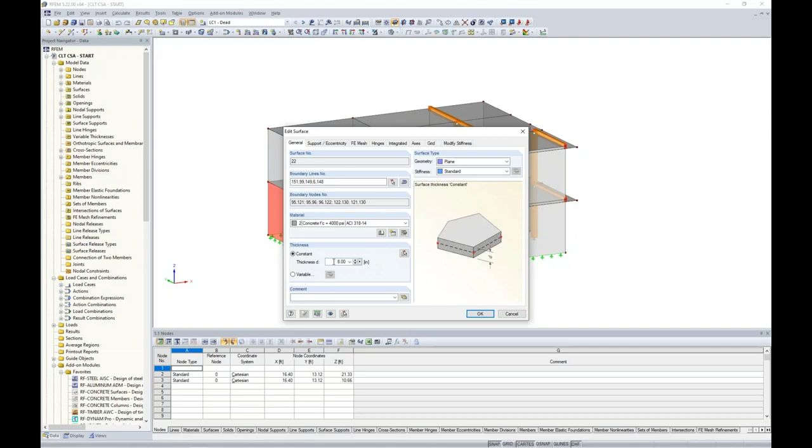and I have also applied some basic loads. But you'll notice that the entire structure is this gray color. And if we click on any one of these panels, you'll see here that the material was defined with concrete. So with the process of modeling a CLT structure within the main program first, we just need a simple placeholder for all of these panels. Concrete, steel, it doesn't matter, as well as the thickness doesn't matter, because eventually within the RF-LAMINATE add-on module, we're going to override this material with our true CLT composition details. So for now, we just have our placeholder here of concrete.

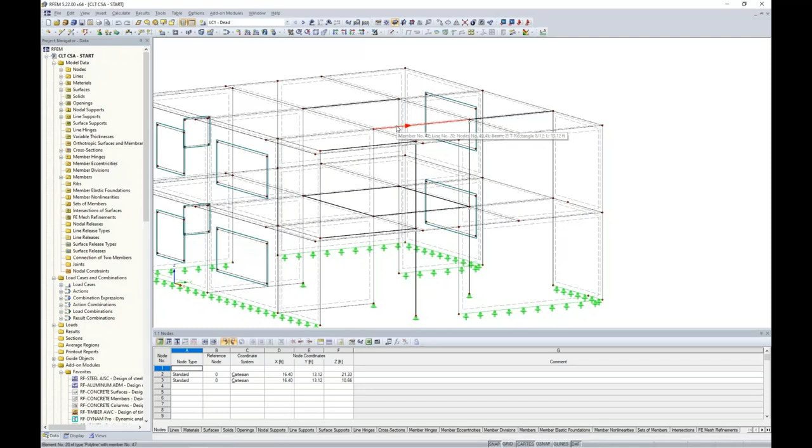You'll also notice that I have some beam members within the program as well as columns. So these are just typical glulam members. For example, we have these beams here that will be holding up certain portions of our CLT ceiling up at the roof. And what you'll find when we turn this into wireframe view is that 1D members are represented by 1D line elements. And so when we turn this into the rendered version here, you can see that the center line of the beams lines up with the center lines of the CLT panels, when in fact we'd actually like to drop these glulam beams below the CLT panels.

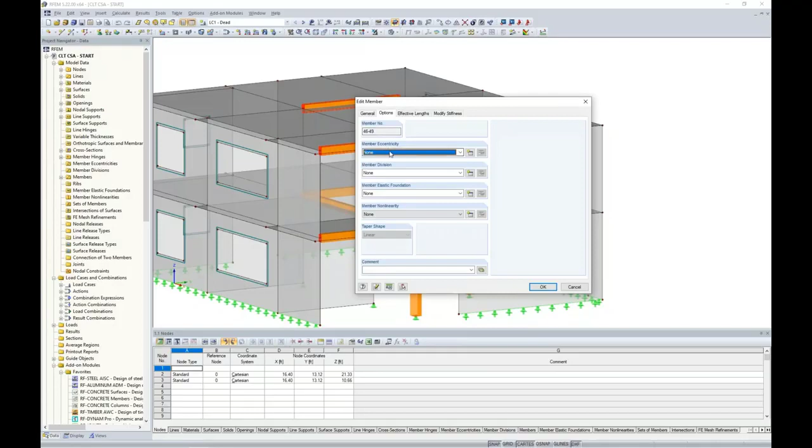And we can do this by applying a new eccentricity. So how I can do this is to select all of these members at my roof level. We can right click to edit the member. And under the second tab here, I have options where I can define a new member eccentricity. So I could go ahead and manually type in the eccentricity distance. I'd like to drop this beam below the panel by considering half the depth of the beam as well as half the thickness of the panel. But the problem is that if we make any changes to the panel thickness or the size of the beam, I'll have to go in here and manually adjust that eccentricity distance again.

So rather, it's useful to use this automatic option here where we can line up the top of the member and offset it from the bottom point of a surface. So I can choose the top of the beam. I can graphically choose any surface at my roof level. So we'll choose surface number 63. And I'll choose the bottom point of that surface. So now when I click OK through these dialog boxes, you can see those beams now drop below the panels. Now the benefit of this is that when we go in and we adjust the true CLT properties, the thickness will be changed from what we currently have in the model, but that eccentricity distance will automatically be adjusted.

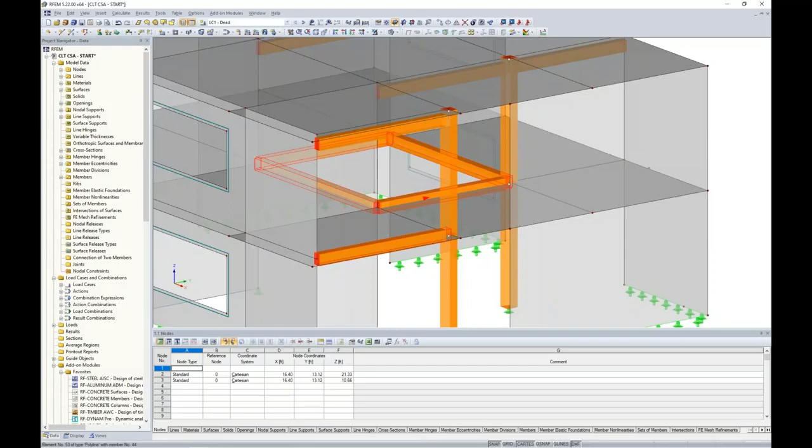Now we want to do the same thing at the first roof or the first level here. So I'm going to hold down my control key to highlight all my beam members at this first level. I can double click to activate this edit member dialog box. We can create a new member eccentricity, and in the same manner I'm just going to take the top point

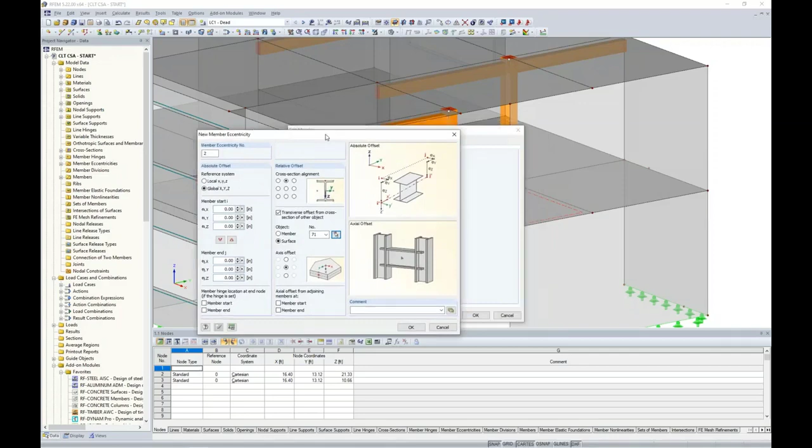of the beam and I'm going to offset it from a surface, but this time I'm going to choose a surface at this first level, surface number 71. We choose the bottom point of that surface, I click OK, and now you can see that those beams were dropped below those panels as well.

Okay, so essentially the basic geometry is complete. I did want to show that I have applied a few loads to the structure. So you can see here my dead load. If we activate the loads graphically, just simple surface loads on both the roof and the first level. We can take a look at live load, exact same concept.

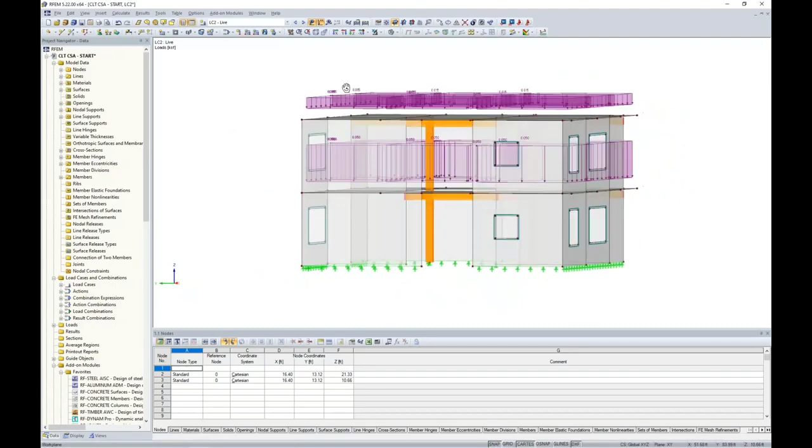Maybe we've just adjusted our magnitudes here. A snow load, which is just activated on the roof level, and then a simple lateral load for wind, which is applied in the global Y direction here.

So when you first create a model, I'm going to reactivate this dialog box by right-clicking on my model name and going to General Data. When we first create the model, or we can go back into it as I just showed you, the load combinations will automatically be created according to the standard that I've selected within this drop-down box.

So you can see here the NBC 2015 was selected. We also have the ASCE 7 2016, as well as many other international codes, including the Eurocode. When this checkbox is checked, those load combinations will automatically be considered by the standard that you've selected within this dropdown. If we uncheck this, then we can manually create our load combinations and this standard will be ignored.

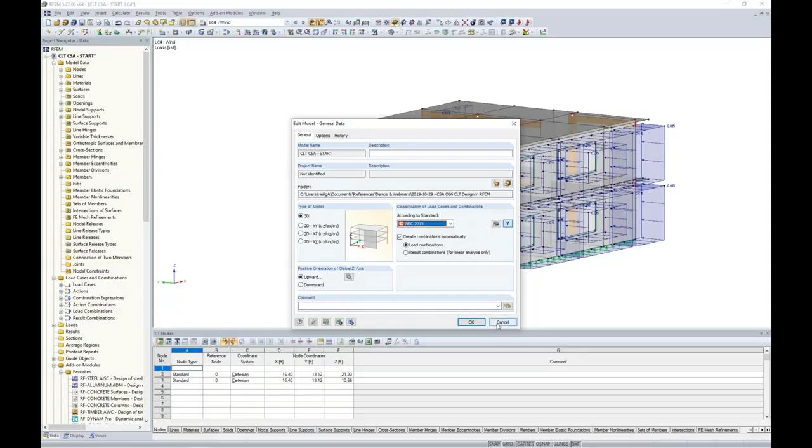So taking advantage of the NBC 2015 for today, I can launch my load cases and combinations dialog box. And once again, we can see our simple load cases that we've defined here. But under the combination expressions, the program's automatically going to generate my strength load combinations per the NBC 2015, as well as my serviceability load combinations.

If I'm curious to see what those are according to the standard, I can click my info button here to see the load combinations directly from the code. Now, most importantly might be the load combinations tab, though, where we can see these load combinations listed out individually for strength as well as serviceability.

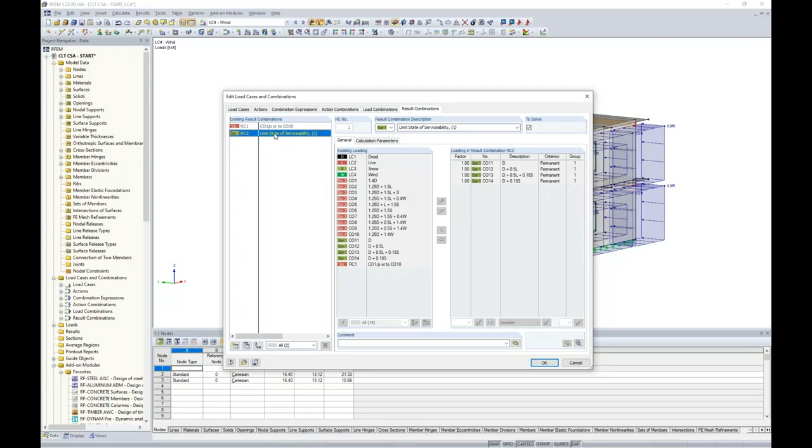So it will consider all of the strength load combinations considered here on the right-hand side and give us the max and min for deflections, internal forces, support reactions. Same thing with the serviceability result combination as well.

So now that we have those load combinations defined, we can view them here graphically, which will include all the dead, live, wind, and snow load shown on the structure here. And you would think that, okay, we must be fairly close to running an analysis, but remember we still have all of these concrete panels defined here rather than our true CLT panels.

So this is where we want to launch the add-on module RF-LAMINATE. And the add-on modules can be found within the project navigator over here on the left, and you can see this long list of add-on modules.

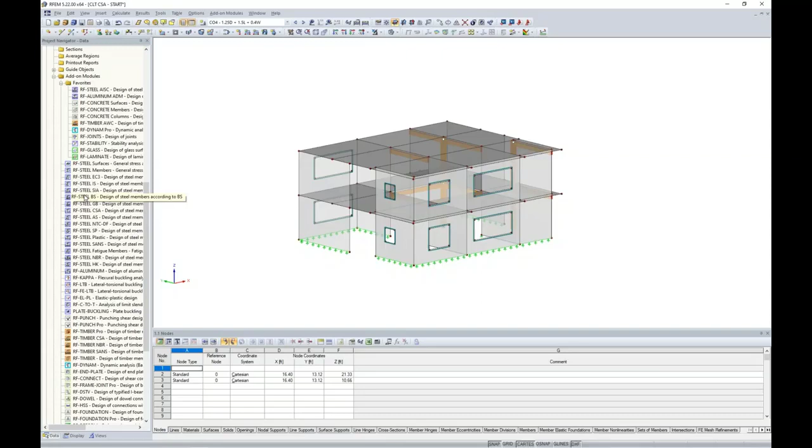So we can launch RF-LAMINATE here. The add-on modules are also available within this drop-down box at the top, and we can find RF-LAMINATE under Others. So when I say add-on module, it's nothing more than just this simple dialog box that pops up within our main program RFEM here. So let us jump back to the PowerPoint to discuss exactly how this add-on module is working with our main program RFEM.

So pretty soon we will go ahead and define the individual layers for our CLT compositions. And each individual layer has its own stiffness matrix based on the modulus of elasticity and the shear modulus. And we can see a simple example of a single layer stiffness matrix here.

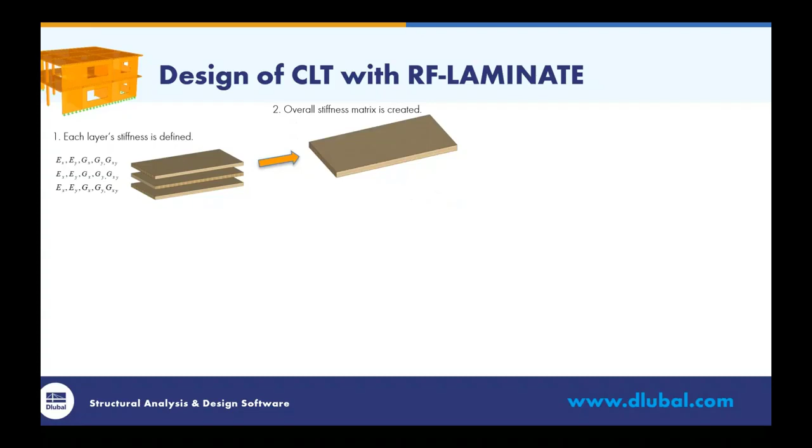So what this add-on module is going to do for us then is consider all layers together to create much more of a global stiffness matrix for the panel itself. And you can see here an example of the D11 entry, for example, for a single panel. Now we're going to take this overall stiffness matrix and we're going to export it back out to RFEM.

So instead of seeing those concrete surfaces, we'll now see the true stiffness of these CLT compositions exported back out to the structure. We can run our analysis to determine what the internal forces are on these panels. Well, we're going to take these internal forces from the main program RFEM and we're going to bring them back into the add-on module in RF-LAMINATE.

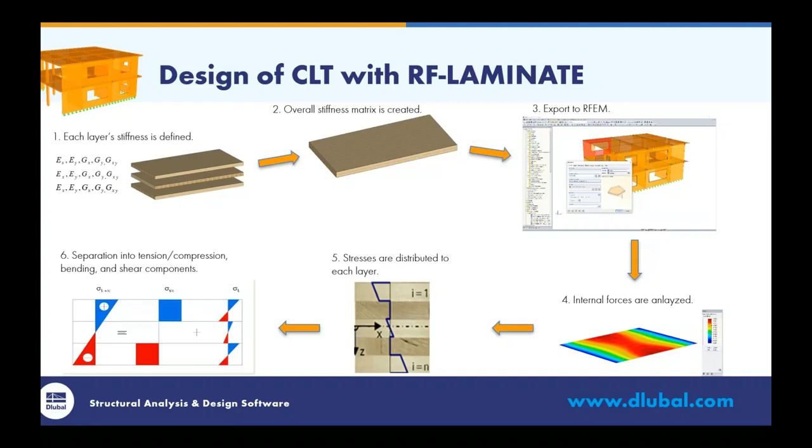And we're going to check these stresses in comparison to the design strength set forth by both the material as well as taking into consideration the CSA standard to eventually give us a stress design ratio. So that's what's going on behind the scenes, and that's why we want to take advantage of this add-on module for CLT. So the first thing to do when we are within this add-on module is to choose our standard.

And you'll notice here that we have just added the CSA O86. So this is the standard we want to take advantage of within the module today. We also have the NDS, both the 2018 and 2015, as well as European standards. So we want to select the surfaces that we're interested in designing.

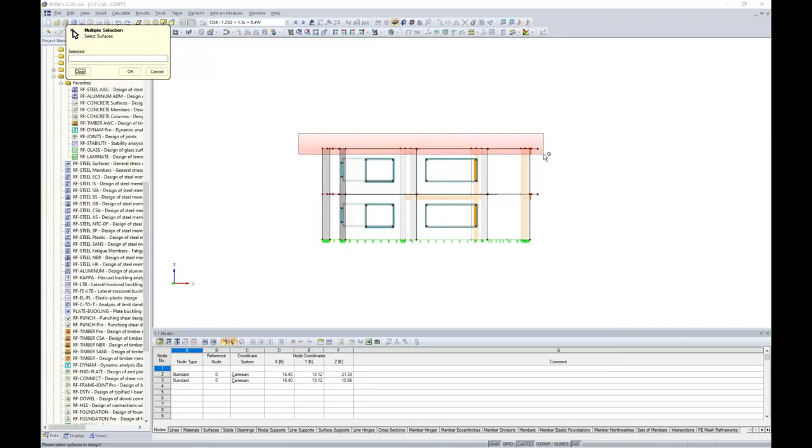So for today, perhaps I'm only interested in the top roof panels, so I can graphically select those, as well as maybe a few wall panels here. So I'm not designing all of the surfaces. I'm only interested in designing these few that I've selected here. As far as the ultimate limit state, I want to choose all of my strength load combinations and move them over to the right so they'll be considered for design.

Then I have my serviceability limit state where I'm going to choose my serviceability load combinations from the NBC 2015 and move them over to the right-hand side. Now keep in mind all this information for our load combinations was brought in from the main program RFEM. I don't need to redefine any of this. Then we just simply move down the list over here on the left.

So the next table here is our material characteristics for our CLT compositions. I want to rename our first composition to floors. Now, what I can also do is select the surfaces that I would like to assign this composition to. So remember, everything is defined as concrete right now in our main program. So for our floors, maybe we select the roof panels.

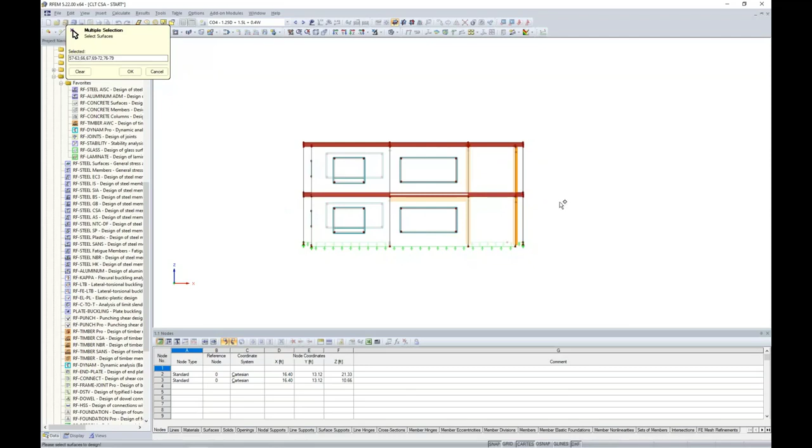We also select the first level here. And then now this composition will be assigned to all of these surfaces listed here. We also have the ability, if you'd like, to change the color. By default, the color is blue, but maybe we want to change it to more of a wood color. So we can change that color here, including the texture.

Then under the layers, well, this is where I individually define the different layers for my CLT layups. I can click on these three buttons here, and what this will allow me to do is to pull open the material database that we have available within RFEM. And over on the left, I can filter to timber, I can filter to wood North America, and underneath this we have both the AWC and the CSA. So all materials are available from the CSA standard.

If we just choose any arbitrary material, we can see the material properties are presented to us here. We click OK. We give our first layer a thickness, so maybe 1.5 inches, and the first direction would be 0 degrees. You can see all the material properties are also listed within this table. So our second layer would be defined in a similar manner. We can choose that same material if we'd like. We keep the same thickness, but this time the second layer would be oriented at 90 degrees.

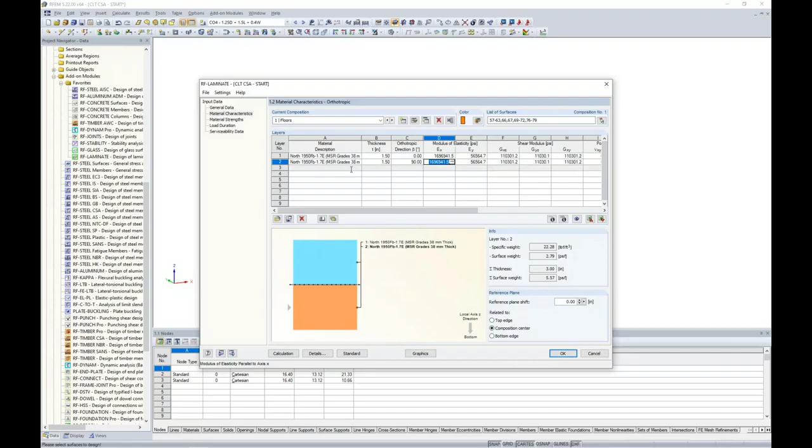From the first layer, this is relative to the local x-axis, which we'll get into a little bit later. Once you create your custom layups here, you have the ability to save them into the library and open them up for a future model.

We also have the ability to take advantage of the imported layers from our library already available. When I activate this option, you'll notice the producer dropdown has quite a few producers, including many producers specific to North America, like Nordic Structures and SmartLam, Structurlam.

Today we also have the PRG 320, which we can utilize for Canada, for example. Then we choose the type, grade E1, and the thickness, 105 millimeters. We have our 3 layers generated automatically. When I click OK, the materials, thicknesses, and orientation are automatically brought into this table based on that specific producer.

The other thing we need to discuss before moving on for this composition is the composition details, which we can find with this dialog box here. This is fairly important for the analysis in order to get accurate results based on the materials and products you're using.

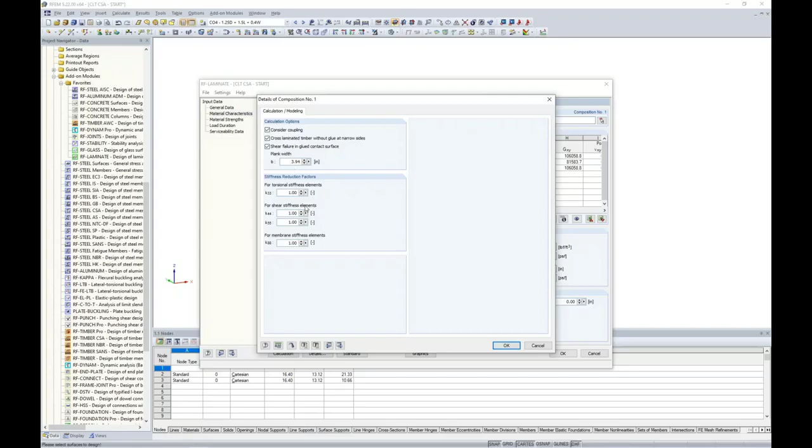You'll see here a few different options: consider coupling, CLT without glue at the narrow sides, as well as shear failure, which relates to torsion design. Then we also have these stiffness reduction factors. I'm going to go back to the PowerPoint to explain this in more detail.

The first option, consider coupling, is automatically checked by default. On the left, when coupling is turned on, we're assuming glue at the top and bottom of these individual layers, essentially coupling each layer to each other. When we look at the stress distribution, according to normal and shear stresses, we see a common relationship between all the layers.

But if we uncheck this option and we're not considering coupling, we're assuming there is no glue coupling these layers together. When we look at the stress distribution, we're going to see really independent behavior for each layer.

The second option here is cross-laminated timber without glue at the narrow side. This is fairly common with most manufacturers, so likely you'll end up checking this checkbox on. This assumes that we do not have glue at the narrow side.

If we take an exaggerated cross-section of a CLT panel, each layer includes individual board elements. With this checkbox turned on, we're assuming there is no glue between the narrow sides of these adjacent boards. Therefore, we're automatically going to set the modulus of elasticity in the local y direction of the panel equal to 0, so we do not have any stiffness in that direction.

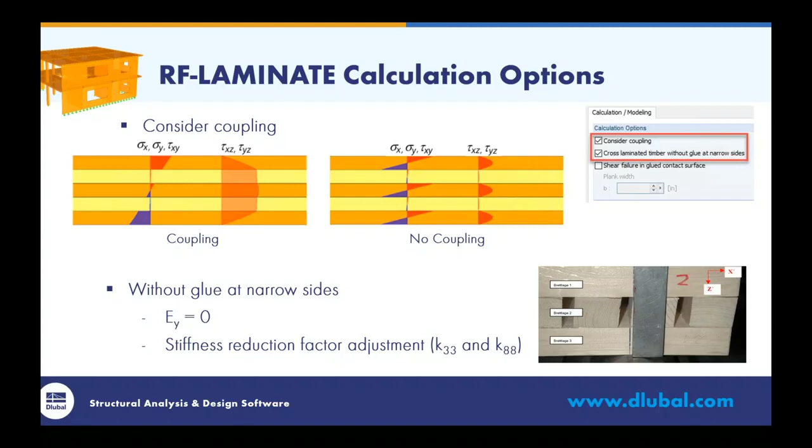It's highly recommended that we also make an adjustment to our stiffness reduction factors, K33 and K88. We'll move on to the next slide to discuss this further.

K33 is for the torsional stiffness of our panel. K88 refers to the in-plane membrane stiffness. Interestingly, neither the CSA standard nor the NDS standard really discuss what to do about stiffness reductions in the event that we do not have glue at the narrow sides.

The Eurocode EC5, in particular the Austrian Annex, has equations that do discuss exactly what should be done for these stiffness reduction factors in the event that we do not have glue. So it's highly recommended we refer to the EC5, which we'll be doing for today's example, but of course you want to take this on a case by case basis.

I have a simple Excel file on my computer that references these equations from the EC5. I just need to input the total thickness of my panel, which is 4.13 inches, the number of layers, which is 3, and my approximate board width, given to me from the manufacturer, which is 4 inches.

From these equations from the EC5, we determine that K33 is equal to 0.435. This is the information we want to put into the torsional stiffness reduction, K33, within the program. Same concept for K88, we determine it's 0.533, and this is the information we would input into the add-on module for the membrane stiffness reduction.

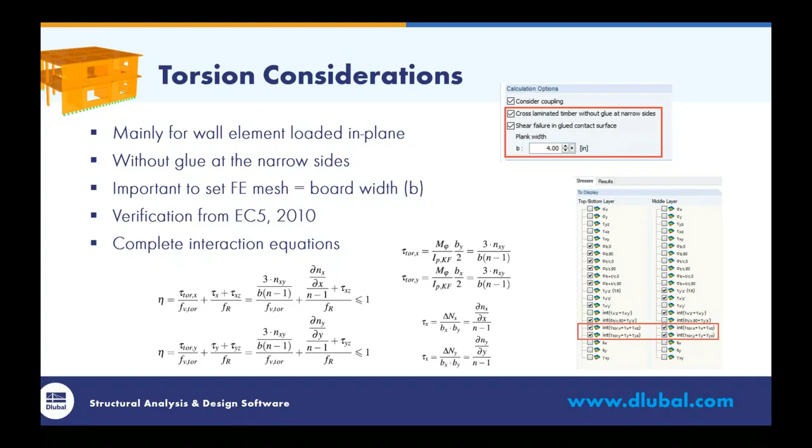Now, torsion, that particular check is not turned on by default within the add-on module. I'll show you a quick screenshot back in RF-LAMINATE of exactly which stresses we can turn on and off. Torsion is not one of them, so you want to go in here and activate this. You can imagine that if we turned on all of these different stresses, it would be very overwhelming, so by default we leave the stresses that we have determined are most important for design activated. We'll do that in just a minute.

Okay, going back to the add-on module, as I mentioned, we're working on our floor elements. So we do not have glue at the narrow sides, but I'm not so concerned with torsion, so we'll go ahead and turn that off. Now, according to that Excel document I just showed you and the EC5 equations, we will reduce K33 to 0.435, and I will reduce K88 by 0.533, and I can click OK.

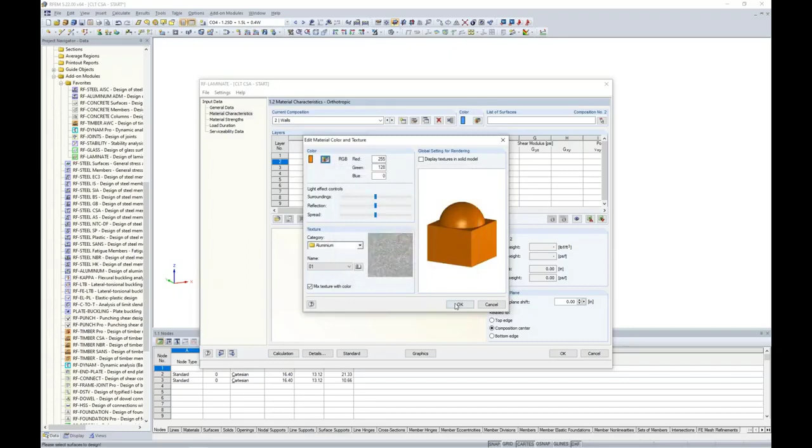So that essentially defines our first composition for our floors. But now we need to create a second composition, and we can do so within this same table. This time we will call this one walls. Maybe we want to quickly change the color here to something more like timber. I can choose my surfaces by graphically selecting all of my wall elements, click OK, and all of the numbers are automatically populated. I'm going to import my layers once again from the library, and you may want to adjust the type, grade, and thickness for your walls, but in our particular case we'll actually use the same type and thickness from our floor elements. I click OK, and my layers are automatically populated.

I want to go into my composition details again because what we have set as default is not applicable from the manufacturer I want to use. So I want to activate that there is no glue at the narrow sides. I also want to activate my torsion checks. In this case, I want to put in a plank width of 4 inches. I once again will reduce K33 to 0.435 and K88 will be reduced by 0.533, and I can click OK.

So just like what I mentioned in the PowerPoint, if we click our cursor within one of these layers, we can actually view the individual stiffness matrix for that layer. Right next to that, we can view the global stiffness matrix for this composition. You can see the numbers are already input here for an entire stiffness matrix, and this is the information that's going to be exported back out to RFEM.

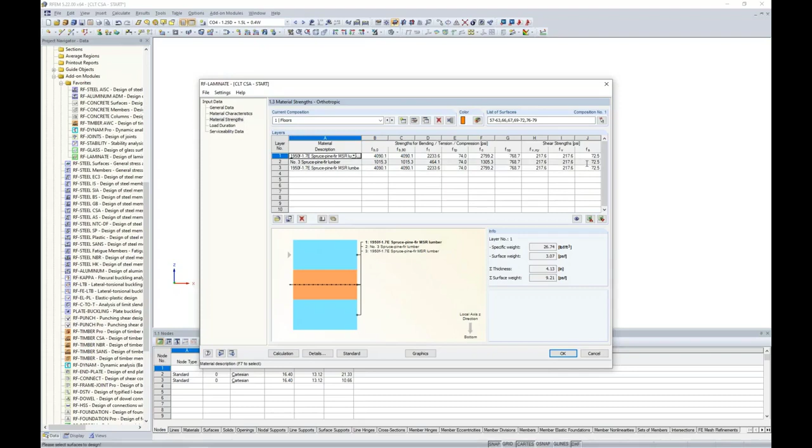On our next table, material strength, we're currently looking at our walls, and we can see here the available strengths for bending, tension, compression, shear, as well as torsion. When I change this to my floors, same thing - I have bending, tension, compression, shear, but you'll notice I do not have an available strength for torsion because we are not checking that for our floor elements. Now, these numbers are simply based on the material strengths given to us from the manufacturer, but because we have selected the CSA standard, we're also going to apply those modification factors directly from the code.

So you might be curious to think, well, which modification factors are exactly being applied? Under the standard button here, we can view this general tab to take a look at exactly which modification factors are effective with these strength designs. Specific to the CSA, we will see the load duration factor, we have resistance factors, and then we have an additional modification factor, K-mod. So what I'm going to do is jump to the PowerPoint and go ahead and explain in a little bit more detail about these modification factors.

Within the CSA standard, the O86, there are quite a few modification factors available. But what we have done is simplify quite a few of these within the RF-LAMINATE module, and there is a reason for this. For example, the system factor, KH.

The code tells us in Chapter 8 that this should be set to 1.0 for all strengths. The service condition factor: the code specifically states that CLT should be used only in dry service conditions, so we'll assume K sub S is equal to 1.0. Treatment factor: we assume the CLT is untreated.

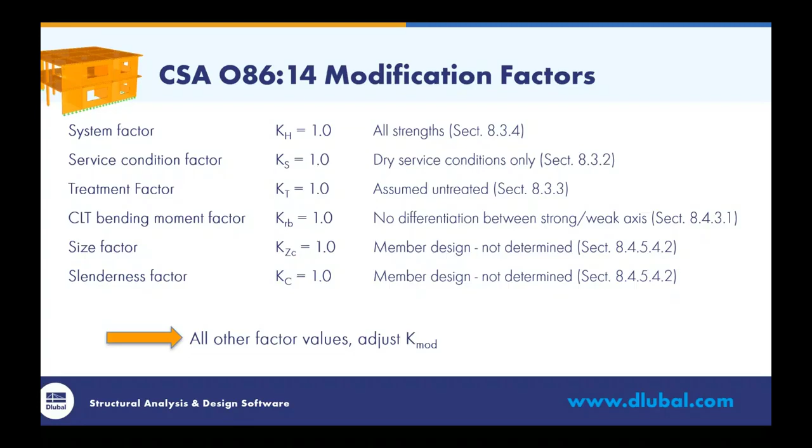So if you have the situation where one of these factors is not equal to 1.0, that's okay. All you need to do is adjust K mod, the modification factor that can be applied to all strengths within RF-LAMINATE. The assumptions on the left for these modification factors are made as 1.0; if you have anything else, just go ahead and adjust K mod, which will modify those design strengths.

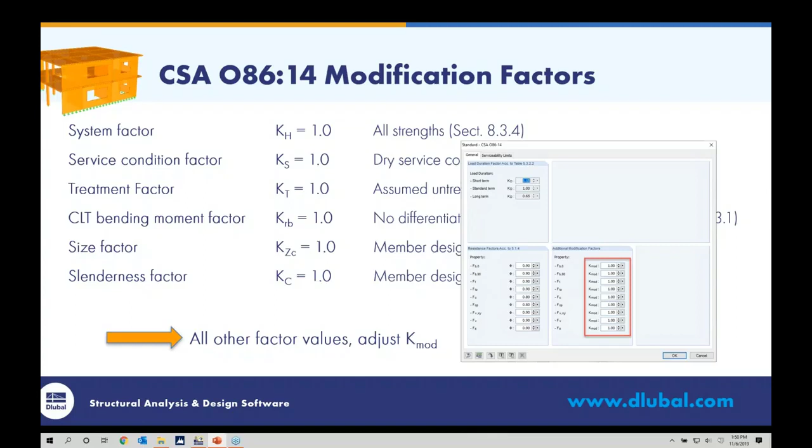So we can go back to the RFEM model here and back into RF-LAMINATE. You can see K-mod available to us here if we want to make those changes. Now for today, I won't be doing that, but I did want to point that out.

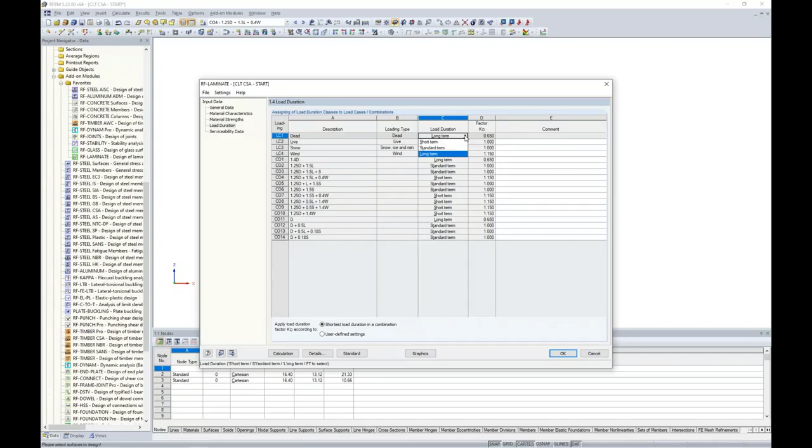The load duration shows us the load duration factors. We have some defaults set here, but you can use this drop-down box if you want to make changes to the load duration factor. Now finally, we have serviceability data.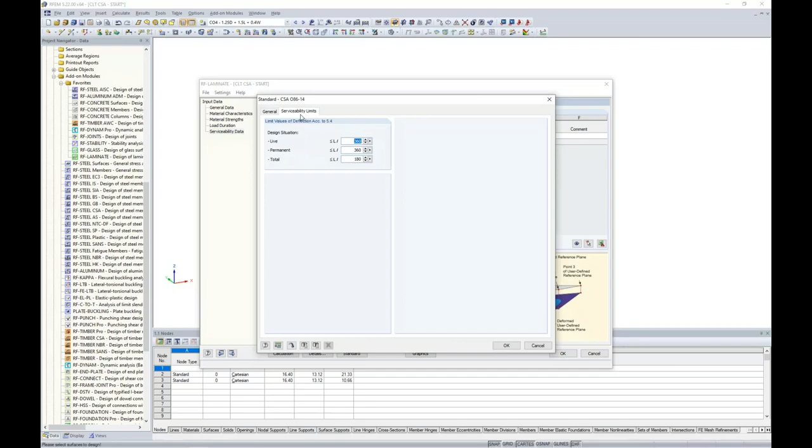So we might be curious to know: what exactly is the limiting deflection ratio? That is controlled under the standard options. Once again, you can find it under serviceability limits. And depending on the design situation, whether that's live, permanent, or total, we have our limiting deflection ratios that we can set.

Now, these design situations are controlled—if you remember, way back when, under the General Data tab—we moved the serviceability load combinations over to the right. You can see that within these load combinations, we can set whether this is live, permanent, or total. So maybe for our design situation today, we will set all of our load combinations for serviceability to permanent. So now our limiting deflection ratio will be L/360.

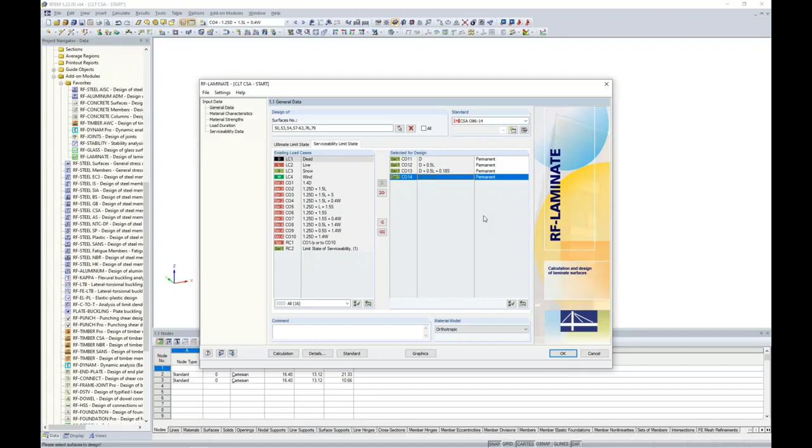So when I click OK and go back to the RFEM model, you'll notice here that my structure is no longer gray for concrete, but rather we have these timber colors because we have exported out the true CLT properties. And if I double click on one of these panels, I can see the stiffness is now set to laminate. The material is set to RF-LAMINATE, which is grayed out because all of that is controlled within the add-on module itself, including the thickness.

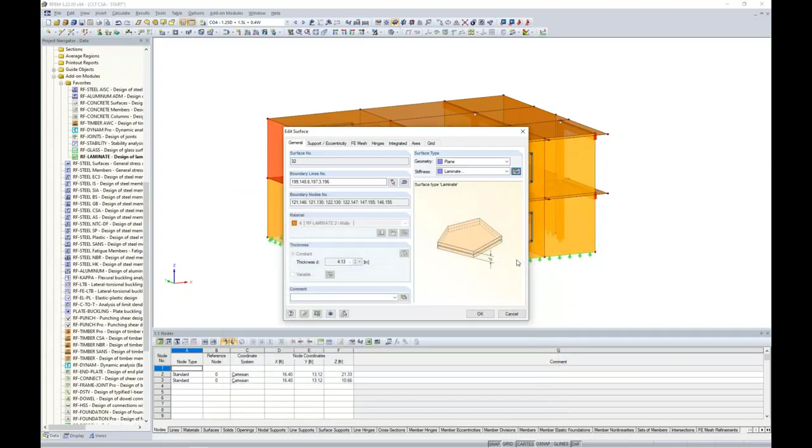We can even view that global stiffness matrix here within the details. Again, this is the exact same information that you would find within the RF-LAMINATE add-on module.

So we might almost be ready to run our analysis, but we have one problem, and that's that every joint within this model right now is a fully fixed connection. And for any of us who have done CLT design or timber design in general, we know that's typically not the case, that these CLT panels will likely be joined together with the use of screws for our connection. Well, with the screw connection, maybe we want to release the moment completely and to account for some type of slip with the screws as well.

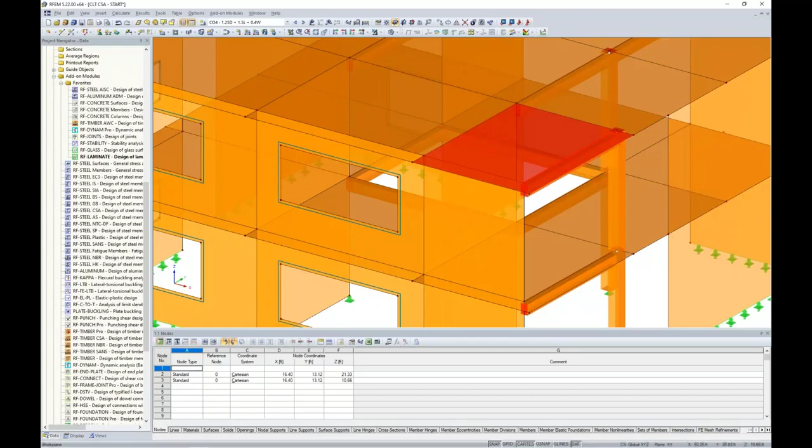The same goes for the connection of our members. If you remember at the beginning of the webinar today, we dropped those members, those glulam members below the CLT panels. Well, we probably don't want to consider a fully fixed connection between the panel as well as the member. So what we want to do is to begin addressing this by taking a look at line releases. So I'm going to highlight only my member here as well as my CLT panel at the roof level, and I'm going to create a visibility by the selected objects.

To create a new line release in the program, we can access this in our Project Navigator under the Data tab. You'll see here line releases. If I right-click, I can create a new line release. What the program asks me to do is to choose the line that this should be applied to. Well, I can graphically choose this commonly shared line, line number 31, that both the panel and this beam member share. Then I need to create a new line release type.

And we can see that when we open up the line release type here, we can activate the release of the moment about the local x-axis. Now, keep in mind that the X, Y, and Z notations here refer to the local axes of the line itself. So these are not the local axes of the panel. These are also not the local axes of the member itself. So what we can do here is to also activate the slip along the line length of X, and rather than completely releasing the translation about the line length X, we can type in a spring constant here of 50 kips per foot.

We also want to show you that nonlinearities are available. Nonlinearities might be applicable with the Z direction. So for example, if we have a downward deflection here of our panel onto our beam, we can set this so that it is fixed if a positive VZ. So if we have a downward deflection here in the VZ direction, then we'll see this connection fully fixed. Now, in turn, if we have an upward deflection of the panel, then we would see a fully released connection between both our beam and our panel. So that's one advantage that you can take of with the nonlinearities of line releases.

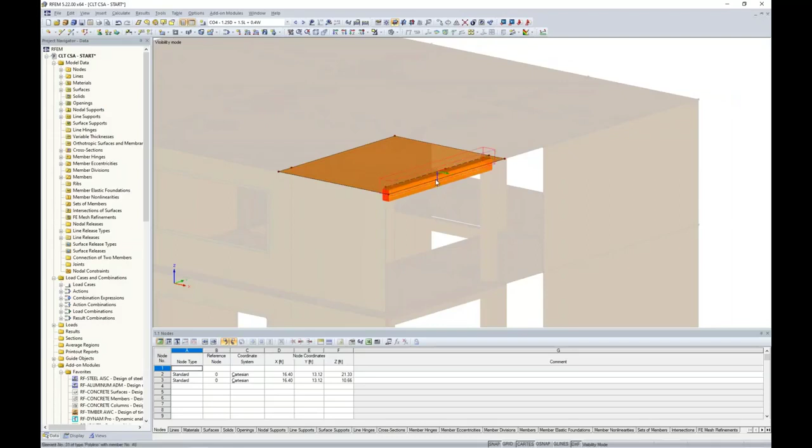Now, we won't be doing that today, so we can go ahead and uncheck this option, but instead we do want to apply the slip of the screws as well as the rotational release for our moment. So we click OK. Now the only thing I need to define here is my surface that this should be released with. And I can graphically choose surface number 63 here. I click OK, and I should see a line release symbol here shown back in RFEM. So now that line release is going to be applied between the member element and the panel.

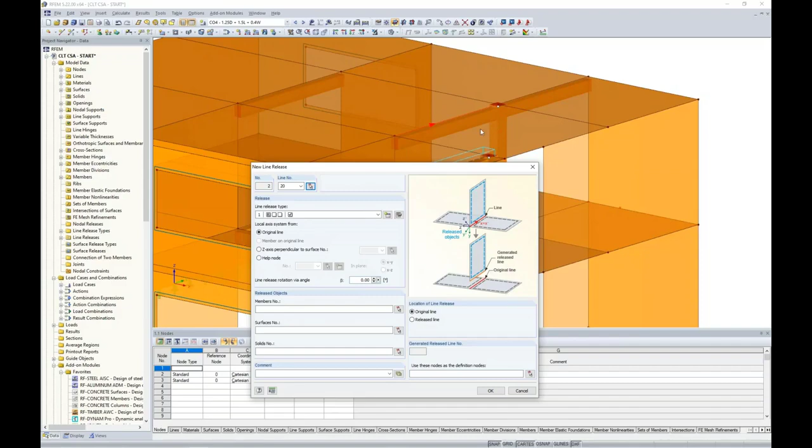So exiting out of this visibility mode, we actually need to apply these line releases to all members and surfaces within the model. So another quick example would be this member we can see over here on the right-hand side. I'm going to right-click to create a new line release. And I am going to graphically select line number 20, which you can see is a commonly shared line with this member. And the line release type is already set, so I don't need to redefine that. Now, what is interesting is that this member does share two different panels. So we can select two surfaces, the surface on the right as well as the surface on the left, to be released from that member. I click OK, and there is my second line release. So we'd want to continue doing so for all the rest of the members within the model, and I'll show you that in just a minute.

But let's quickly move on to the connection of the joint between our CLT panels. So exact same considerations here. These are probably going to be connected with screws or some other type of connection where maybe we want to release a moment and account for the slip of the screws. So rather than moving forward with line releases, I actually want to utilize line hinges.

So I think line releases can be incredibly powerful when it comes to beam to surface connections, but for surface to surface connections, it's a little bit easier to work with line hinges instead. So we can access line hinges over on the left, once again from the Project Navigator, but instead I'm going to go under Insert, Model Data, and you'll see here line hinges, and we can assign to the lines graphically.

So we want to create a line hinge definition, and this should look fairly similar to what we saw with line releases. We want to completely release the moment. We also want to activate a spring constant for the slip along the local axes of the line. And you'll notice we have a couple more options here with rotation, but we do not have the ability to set a nonlinearity with line hinges. So that is one limitation, but perhaps with a panel-to-panel joint, you're not really working with much nonlinearity anyway. So we can click OK.

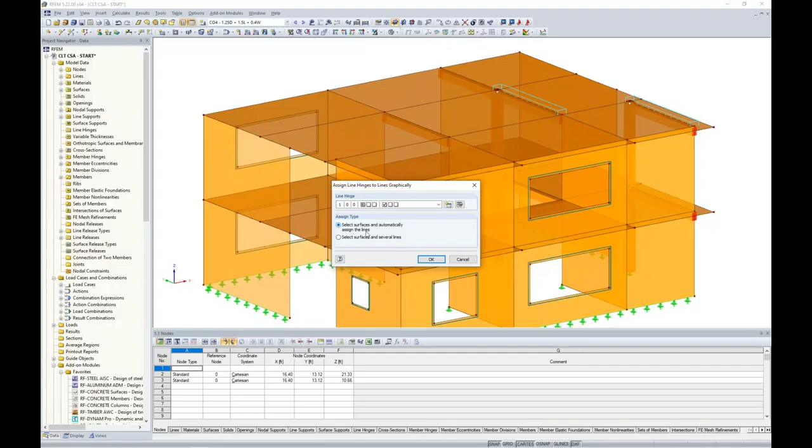So the advantage of using this assign to lines graphically is that I actually can select surfaces and automatically assign the lines. So for example, if I take a look at only my roof elements, I click OK. You'll notice that those line hinges were automatically applied to all of my roof panels, denoted by this symbol here. And we can zoom in here, and although that was extremely beneficial, you'll notice the program even recognizes where it should not be applying line hinges if it's not connecting to another CLT panel.

The problem is that with any FEA software, when we have a joint, for example, where two or more members are framing into it and all of them have a member end release, at least one member needs to be fully fixed. The exact same concept needs to be followed for 2D surfaces as well. If we have two or more surfaces framing in, we do not want to apply line hinges to the joint for all panels. We need to leave at least one fully fixed.

So there's a little bit of cleanup that we'll have to go and do after we assign to all of the lines. And that includes the location here, for example, with our center panel. We would just graphically select these line hinges holding down our control key and hit delete on the keyboard. So now you can see when we are looking at the panel-to-panel connection between the left and right panels, we only have one line hinge defined. Now, if we compare that to a wall framing up into the floor, the roof panel here, this wall is considered fully fixed. So we can leave just one single line hinge here.

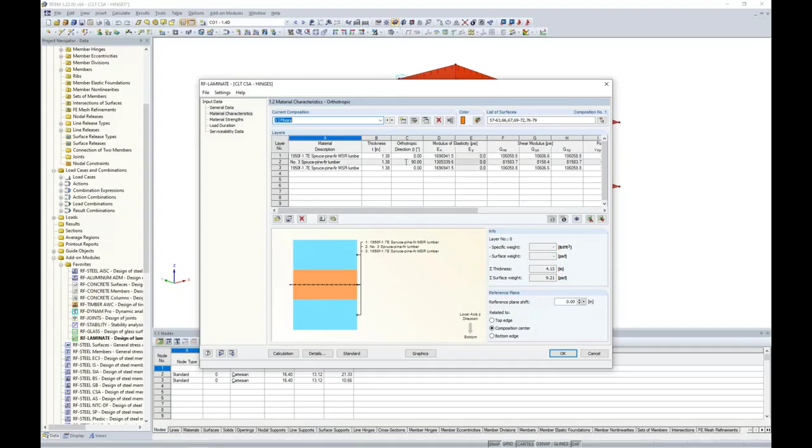The final thing to discuss before running the analysis is I'm going to launch RF-LAMINATE again. And jumping back to material characteristics, remember we are orienting these different layers in relation to the local x-axis. So the first layer is oriented 0 degrees from the x-axis, while the second layer is 90 degrees from the x-axis. So inevitably, this tells us that we have a strong orientation for each one of these panels, and that is related to the local x-axis because we have our two exterior layers oriented along that x-axis.

So what this means, if we're looking at our walls, for example, these walls are going to take some pretty heavy gravity loads. Therefore, we want to orient the strong axes to take the gravity loads. This means the local x-axis needs to be in the vertical direction. If you do not take careful note to orient these panels in the correct direction, then you're really not getting the full strength out of the panel, and it can lead to a much too conservative design.

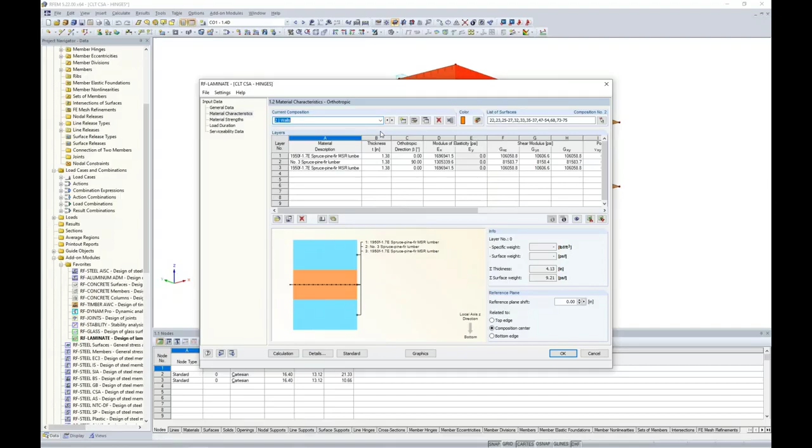So going back to the RFEM model, I will activate only the wall elements by holding down my control key and selecting the vertical panels, creating a visibility by the selected objects. And I can right click on any one of these surfaces to turn on the local axes. So you'll notice that my first wall element up here on the right hand side, the local x-axis is oriented in the vertical direction. That's exactly what we want to take those gravity loads. But if we take a look at the panel right below it on this first level, the local y-axis is oriented in the vertical direction. That is not the strong orientation.

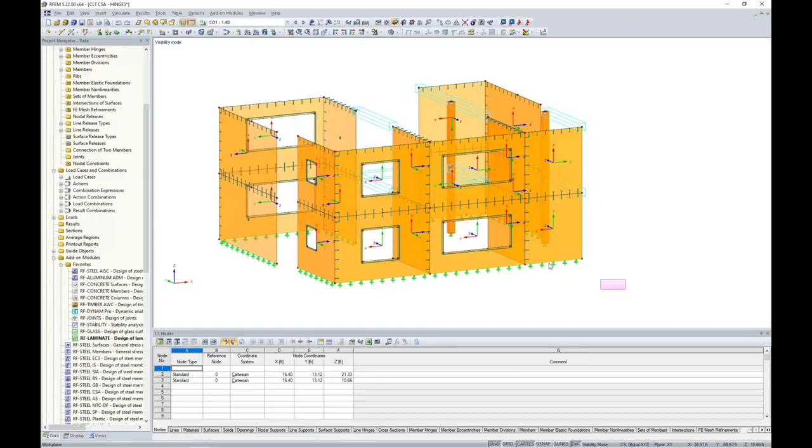Therefore, we need to make sure that we have all of these panels for our walls with the x-axis pointing up. So how can we effectively do that without having to individually rotate each panel or remodel? So what I can do is to highlight my selection box over all elements. I can double click to edit them. And here we have an axes tab.

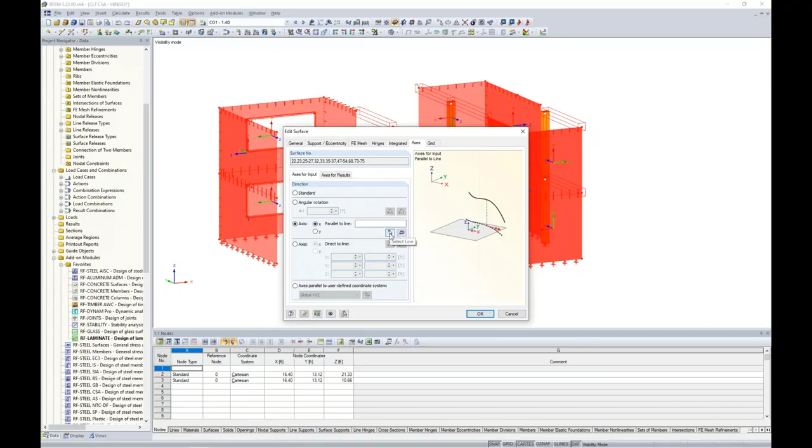The axes tab allows us to orient the local x-axis parallel to a line in the model. So I can graphically select any vertical line. So for example, we'll choose line number 40 here. I click OK, I click OK, and now every single wall element that I selected now has the x-axis parallel to line number 40, which is in the vertical direction to take those gravity loads.

Now, this isn't just limited to walls. The same concept goes for floor panels as well. So if I inverse my visibility here to show only the floor panels, we want to make sure that the x-axis is oriented in the longer span direction. So you can see for my floor panels today, the x-axis is taking that longer span. So perhaps that's okay. We don't need to make any modifications.

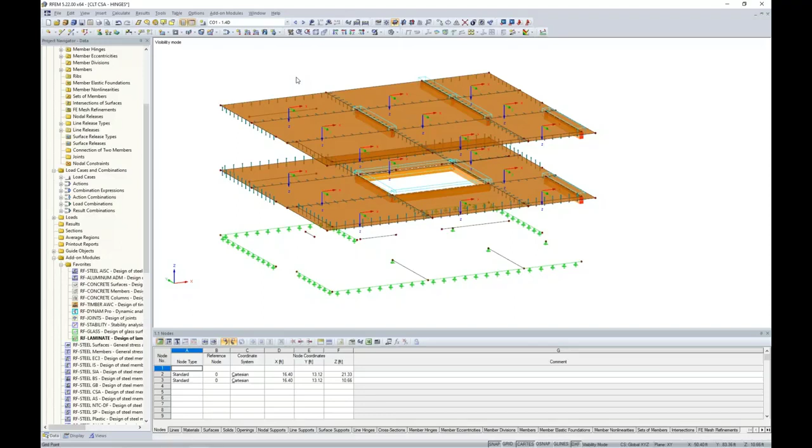But if you did, again, you just follow the same procedure of selecting multiple surfaces at a time and orient them relative to a line that's selected graphically within the model. Okay, so we can right click to turn off those local axes, and we are now finally ready to run our calculation within RF-LAMINATE. And I can run the calculation directly within the add-on module.

Remember from the PowerPoint exactly what this is doing. It's exporting out those global stiffnesses for our panels back out to RFEM. We're running all of the load cases and load combinations back within RFEM. And within that analysis, we're going to pull those internal forces. We're going to bring them back into the add-on module, distribute the stresses to each individual layer, and then further, we're going to separate them out into tension, compression, bending, shear, and torsion stresses.

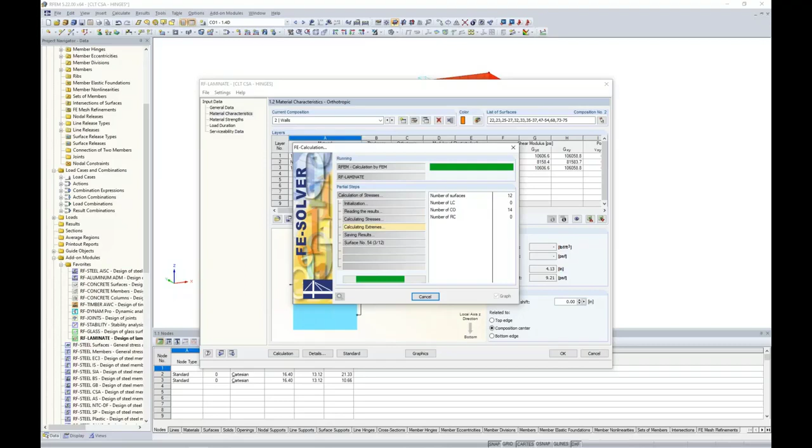So we are now presented with our results here in a table format. We can view the max stress ratio by loading. We can view the max stress ratio by surface, by composition. You'll notice here too, if I pull down my add-on module here and I click anywhere within this table, that the program automatically syncs up exactly which surface I'm looking at within the table.

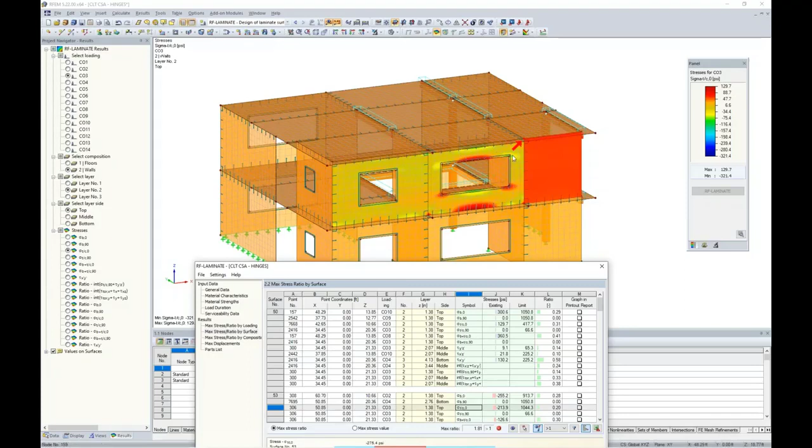Now, even more so, you can see there is a big red arrow here that points out exactly where the controlling force or stress is for that particular check. And within each surface, as I mentioned, we're going to be checking bending, tension, compression, combined interactions here, shear, as well as torsion for our walls, and ultimately coming up with a design ratio.

We also have the max displacements here. So this is our serviceability checks. And remember, we are running in comparison the deflections to L over 360. We will get a max ratio here as well. Now, any of this information, whether it's for serviceability or strength design, can be exported automatically to Microsoft Excel with the click of a button here, if we want to do a little bit further sorting.

Notice as well, all the stress distributions are shown here within each layer and are automatically updated as we click within this table. We also have a parts list given to us, which is just nothing more than a material takeoff. Okay, so if we take a look at the max stress ratio by surface, I think we notice a pretty big problem. We have a max ratio of 1.01 with a big red sad face. That is because we are over the design ratio of 1.0.

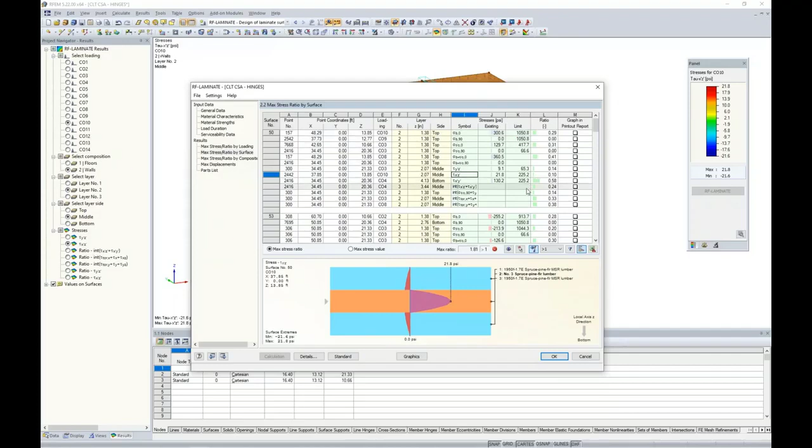So what exactly could be the problem here? Well, what is nice is that rather than filtering through this huge list of information within the table, I can use these filter options here to choose all of my max design ratios which are greater than 1.0. I click on the filter button here, and now I can see exactly where my problem areas are.

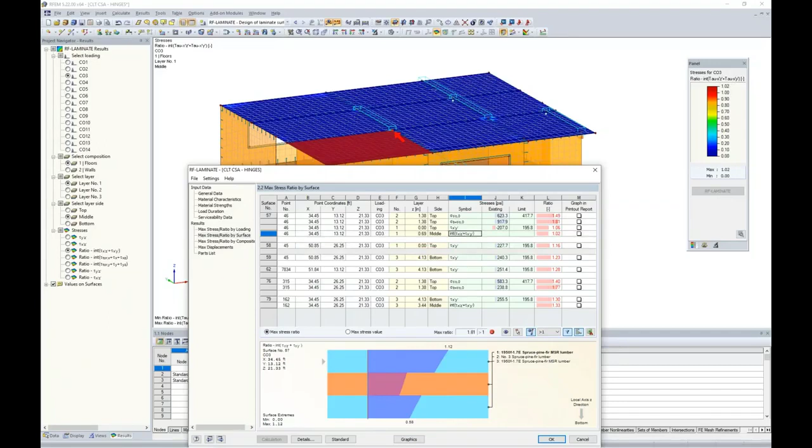You'll notice that as I'm clicking on these different high stress ratios, they seem to be occurring all at these corner locations here. And it appears that the rest of the panels really don't seem to have an issue. So this would probably flag me that this is some type of singularity issue. So let's jump to the graphics view back in RFEM.

Now we're currently looking at RF-LAMINATE here. So this is the result information for the add-on module shown graphically to us back in the main program RFEM. And you can see we can switch to different load combinations that we've run. We could change the composition between floors and walls.

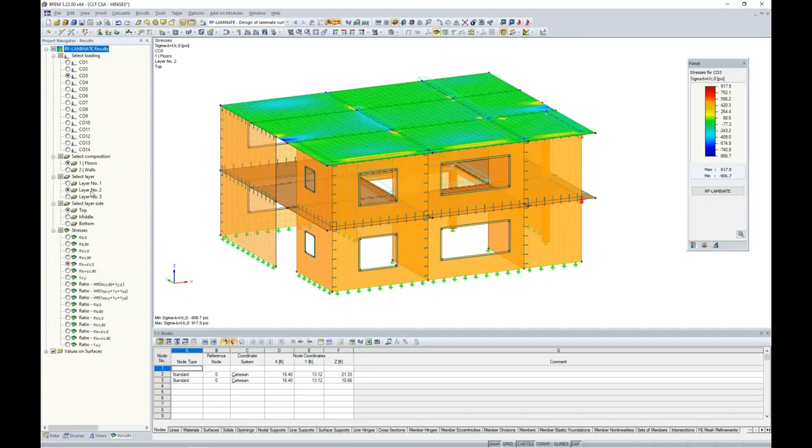We can select the layers, as well as view the individual stresses. Now I'm currently looking at my floors and the middle layer, and if we take a look at one of these checks here, we can turn on the ratio. And this is one of the extremely high ratios, 1.81.

I can zoom in here, and like I said, the rest of the panels seem to be relatively okay, but we just have these extremely high stress peaks right here where maybe we have this beam member framing in underneath the panels, or where we have multiple wall segments kind of coming in together.

And a singularity within any finite element program occurs where we just have high loads at a single FE mesh point, and it creates unrealistic peaks, and therefore we're getting high design ratios, and we might think, okay, we might need to use a larger CLT composition. But in reality, that ends up over designing the structure simply because these high stresses really won't be experienced out in the field when this structure is actually constructed.

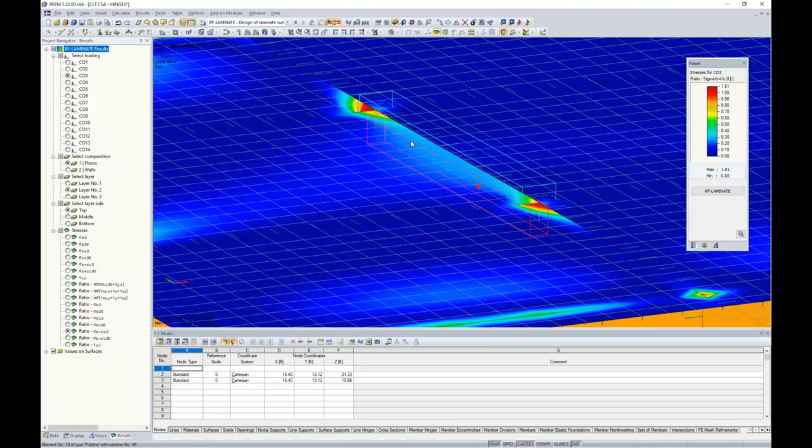So how do we deal with it within finite element programs? And that really comes down to the tools that you have available with the software that you're using. So I want to show you guys some advantages that we have directly within RFEM to deal with singularities.

Singularities might also be very common when we have a column such as this one framing directly into a CLT panel. Again, all of the stresses and forces are being transferred to the panel or vice versa to the column at a single FE mesh point, which just leads to no load distribution.

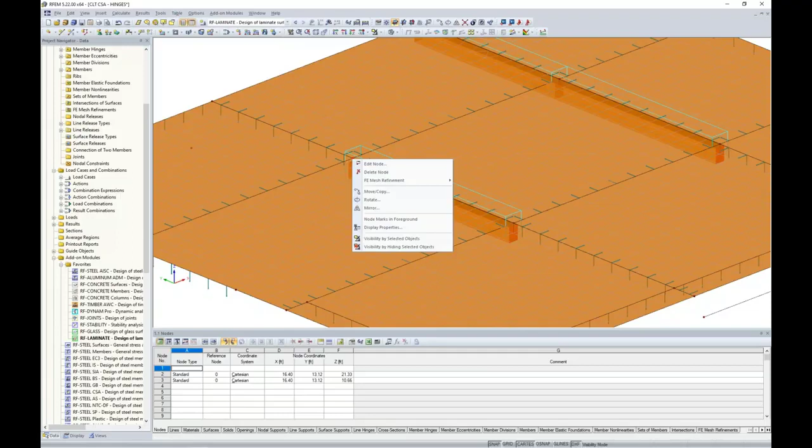So what I'd like to do for the singularities is to take a look at the graphic view here of only my roof panels once again. And I'm going to turn off my results, and we'll focus in on these two nodes here on either side of the beam. The first thing I want to do is to apply an FE mesh refinement. So I can right click on the node, and I can go to New FE Mesh Refinement.

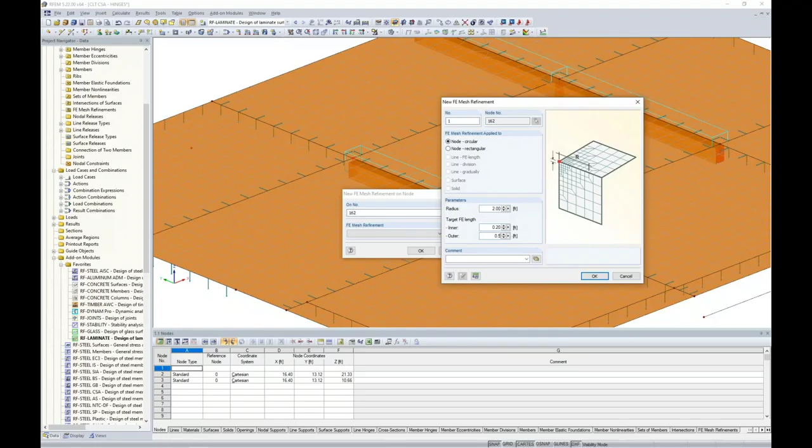And we create a new FE mesh refinement definition here. It already recognizes it's about a node. We'll give it a radius of 2 feet. The target FE length will be 0.2 on the inner diameter, as well as the outer diameter will be 0.5. We click OK. And once we have defined this FE mesh refinement, you can see the FE mesh refinement symbol

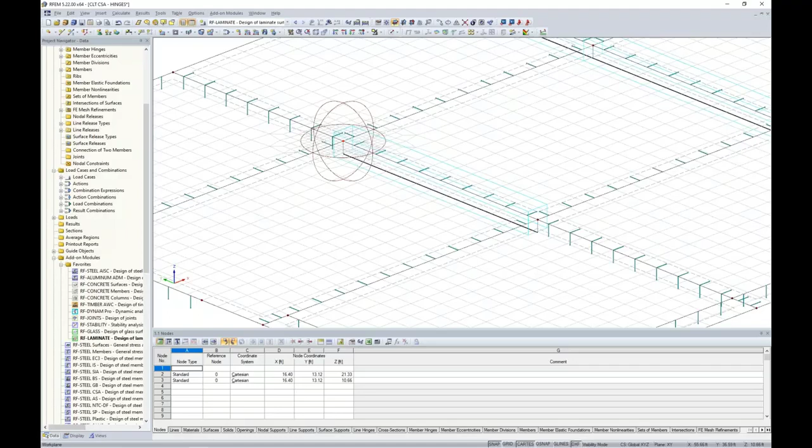shown here. If I turn this into wireframe view and we go to calculate, generate FE mesh, you'll notice that my FE mesh is much smaller about this single node, and it transitions back into my global settings of 1 foot width FE mesh elements quite nicely. So the advantage of this is not adding in a huge number of FE mesh elements, which is really going to slow down your calculation time, but rather just focusing in on this single location here about the node.

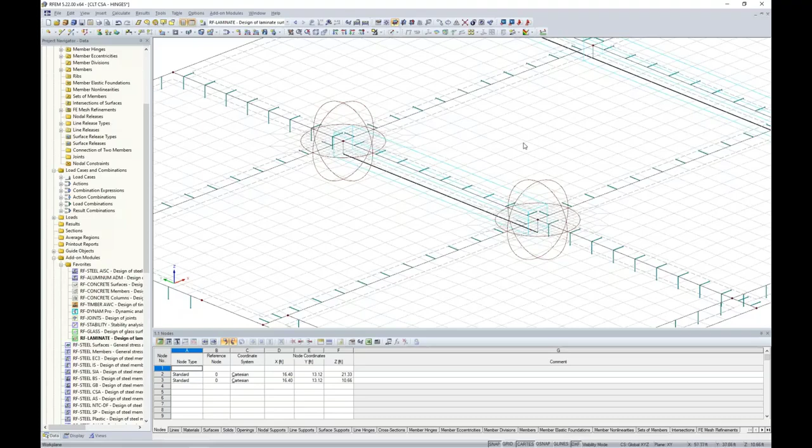Now we also can take FE mesh refinements. We can hold down our control key and drag and drop them to different locations to make a copy. So now when I go to calculate, generate FE mesh, you can see that both of these nodes have the FE mesh refinements applied. Now this is not going to take care of our singularity problem, but what it is going to do is to make this high stress location available to us and result in a much smaller location rather than using the 1 foot width of the global FE mesh settings. So we're kind of isolating the issue into a smaller area.

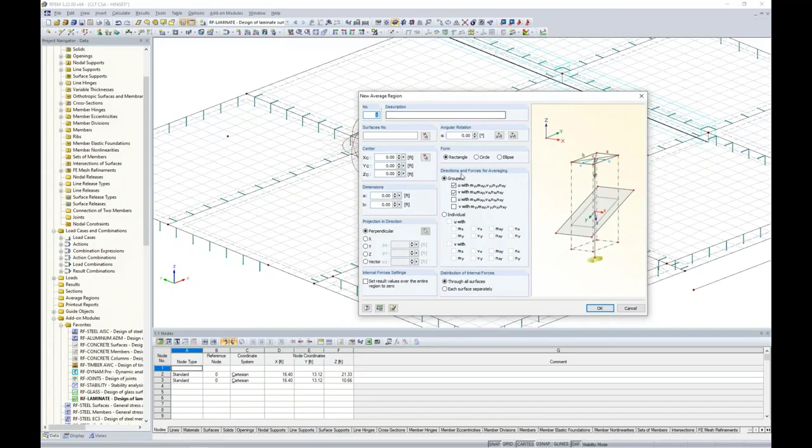So the second part to eliminating these singularities is to apply what's called an average region. And we can access average regions here within our project navigator. Once again, we can right click to create a new average region. And with the average region, it's exactly as it sounds in that it's going to average out the internal forces over a set region that we define.

The first thing I want to do is to select the surfaces this average region should be applied to. So I'll turn this back into a rendered view and we'll choose all 4 surfaces here that share this common node. I click OK. I want to apply the average region at this particular node. You'll notice that the node coordinates are updated. Then I need to give the average region dimensions.

And a common question is, well, how big should I make my average region? And that's really up to the engineer's discretion and your particular model. There really is no rule of thumb for how big an average region should be, but you should really look at it and make sure that the results make sense once you apply this average region, that we're getting realistic load distribution.

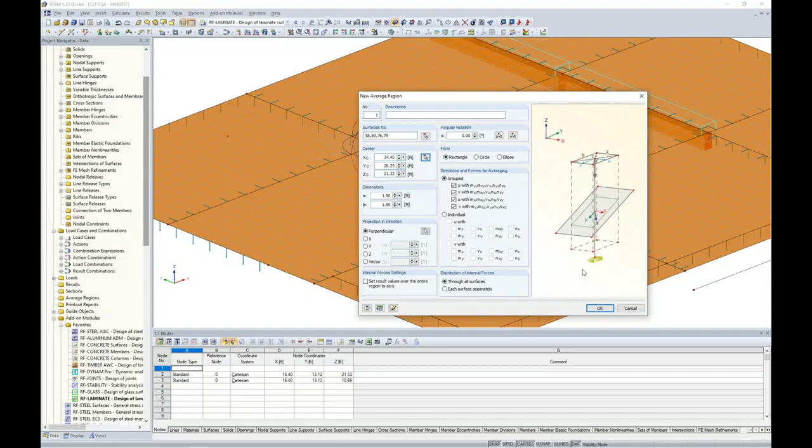So for today, I'm going to use a dimension of 1.5 feet by 1.5 feet. I'm going to check all check boxes over here on the right. Now what this allows me to do is to average out all internal forces in all 4 directions over this average region dimensions. I can click OK, and now you can see we have the average region symbol shown to us graphically here within the model.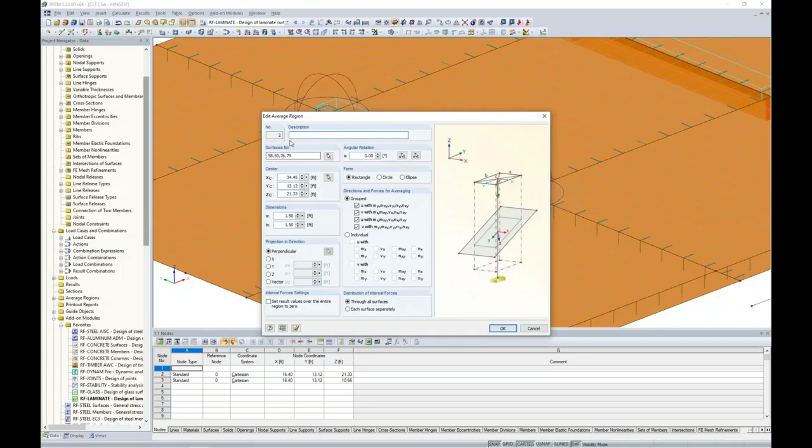So similar to FE mesh refinements, I can select the average region, hold down my control key, and drag and drop it to a different node. But keep in mind that we do need to double click to edit this average region and change the surfaces here that it's applied to. We don't want to apply it to the 4 surfaces on the left, but rather the 4 surfaces on the right for that average region, and I can click OK.

So now you can see both the FE mesh refinement symbols as well as the average region symbols applied to the structure at these locations. So maybe jumping to just a simple load combination here, 1.4 dead load, let's quickly run a calculation and see how our average regions affect our results.

So once this is done calculating, I'm currently looking at my results here for this particular load combination. And I'm looking at my surface internal forces in the NY direction, so the axial forces in the local Y direction. And we can clearly see with these contours how they are affected by this average region. Notice the magnitude here of my force is 3.75 kip per feet.

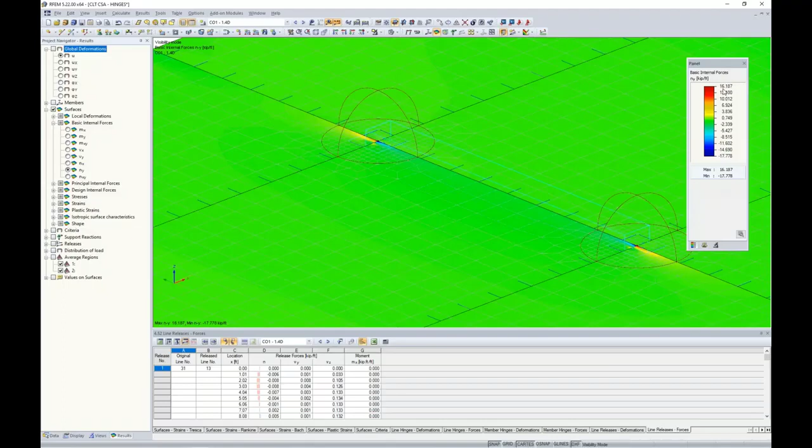We have the ability over in the Project Navigator to turn off our average regions as well. Now notice that we went from 3.75 and we jumped clear up to 16.19 kip per feet. So you can see how the average regions will really smooth out those problem locations, and we get more realistic internal forces that are eventually used for our design within RF-LAMINATE.

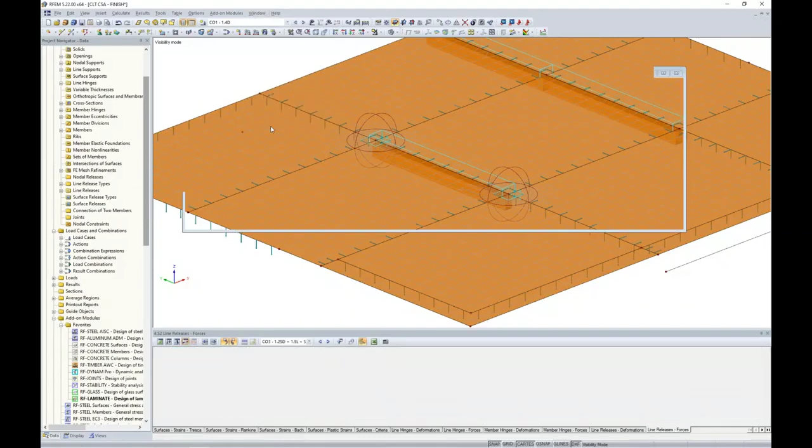So what we'd like to do then is to utilize these average regions as well as the FE mesh refinements for the entire model. So once again, jumping to an already saved model here, I have applied these average regions as well as FE mesh refinements to a lot of the different joints within the model that maybe I had some issue. Now keep in mind, this is not necessary for every single joint within the model. You really only need to apply it where you appear to be having singularity issues. So I took the initiative here, applied it to many of the different joints just for completeness.

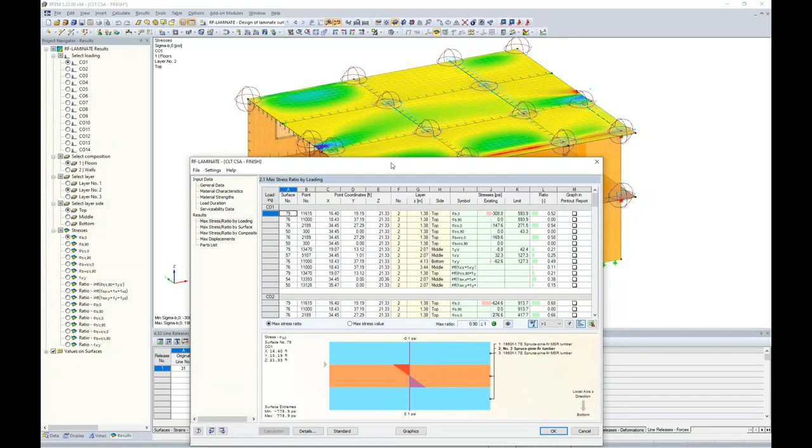And what we would do now after we have applied it to the entire model is to run the calculation with RF-LAMINATE again. Now, you might apply all of these average regions, all of these FE mesh refinements, run your calculation, and find that your design ratio didn't change at all. And this is a two-part process. The reason why is under the Details tab, we have to tell the program under the Results tab here to apply the smooth internal forces in the defined average regions. You have to turn this checkbox on, otherwise average regions are going to be completely ignored, and this is turned off by default. So once you've applied the average regions, come in here, check on this checkbox.

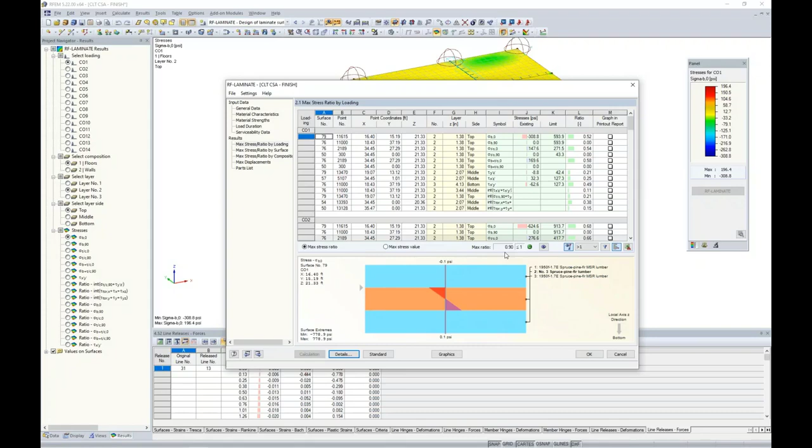You can run your calculation again, and now we take a look at our max design ratios, and we see a max check now of 0.9. So that was significantly reduced from 1.81 clear down to 0.9 just by applying average regions and those FE mesh refinements rather than increasing the thickness of our panels or decreasing loads. So that is how you essentially can deal with singularities with CLT design.

Okay, so going back to RFEM once again, there's just a couple other things I'd like to point out. When we look at any one of these other load combinations here, and we're currently looking at dead load, live load, snow load applied to the structure, keep in mind we also have the rest of our result information available to us within this Results tab. This includes for our members, we have the internal forces available to us.

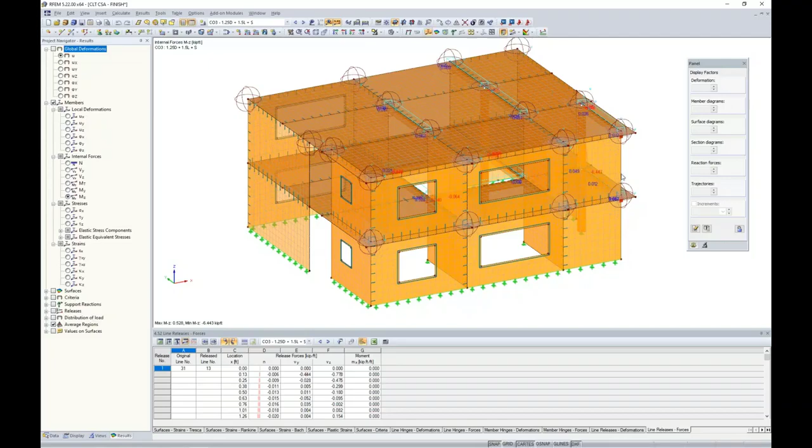So if we take a look at maybe this single column, I create a visibility by the selected objects. I can take a look at the axial forces or the normal forces within this member, shear forces in both the strong and weak axis direction, as well as bending moments. This is the information that we could either take into our own design tools to do member design as well, or you can take advantage of the RF-TIMBER CSA or RF-TIMBER AWC add-on modules to do member design all within one program.

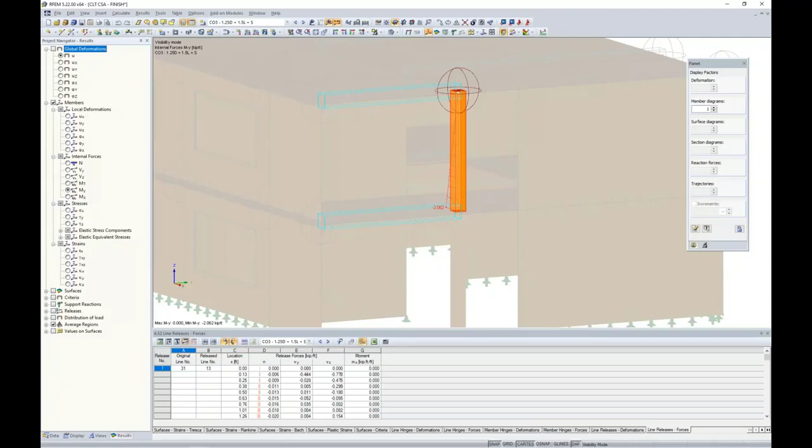This is also true for concrete design, steel design, aluminum. If you have multi-material elements within the same model, you can utilize some of the other add-on modules to do design as well. The other very interesting thing we have to deal with when it comes to CLT design is, of course, the connection design.

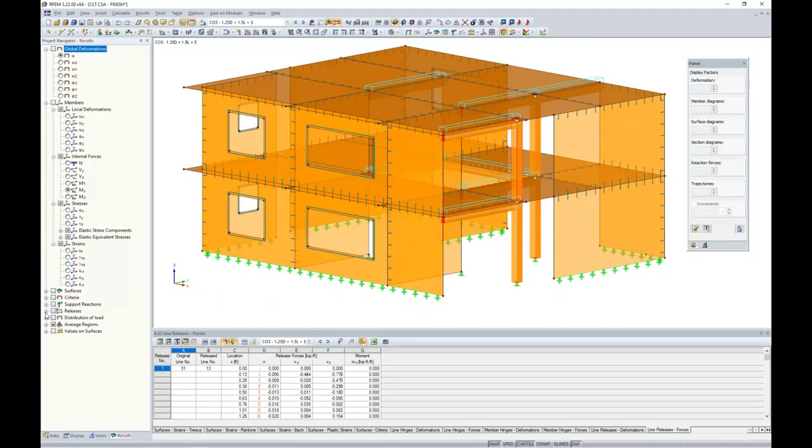Under the Display tab, I'm going to go ahead and turn off the FE mesh refinements, and maybe turn off the FE mesh as well as my average regions just to make this a little bit easier to see. So with the addition of the line hinges and line releases, we now have the ability to expand our releases tree, and this is quite powerful.

If I make a selection here of just a few wall panels, and we'll turn on the visibility by the selected objects, we can actually view the local deformations graphically within the model of the line hinges itself.

Now why this is powerful is because we also have the ability to view the internal forces. For example, the axial forces, we can view shear forces at those particular joints. We can also turn on the moment, but remember we released the moment, so we'd expect everything to be 0 here.

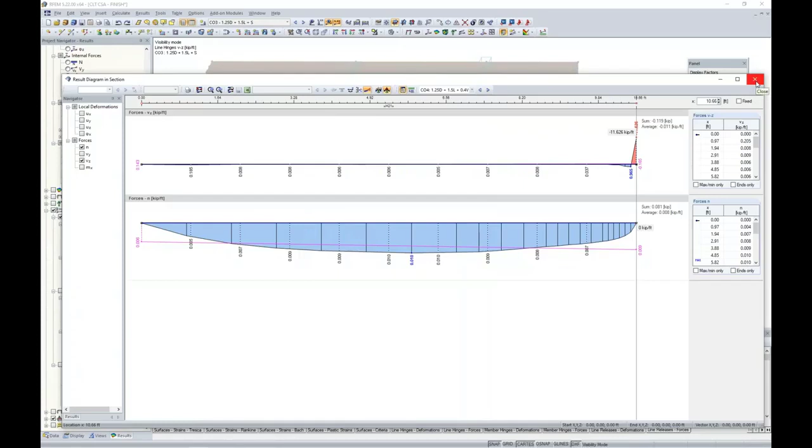For any one of these line hinges, we can always right-click and go to the results diagram, and you can see in a little bit more detail exactly what's going on with these internal forces. We can change to different load combinations here if we're interested in viewing the results for those particular line hinges for different load combinations.

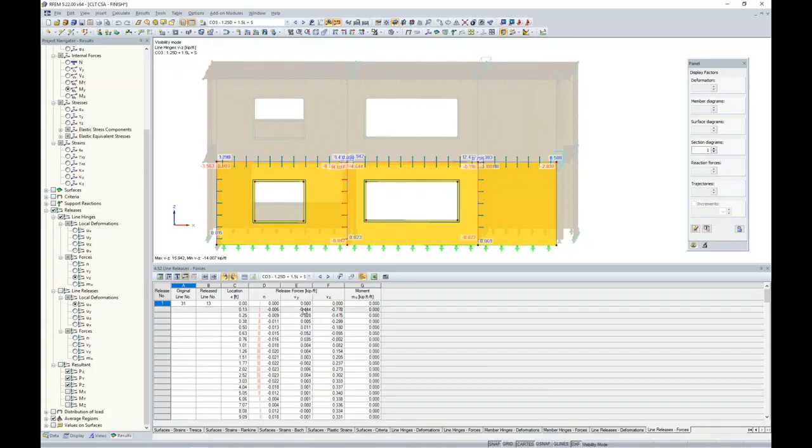So this is the information that we'd probably want to export out to Microsoft Excel to do our connection design. Not only do we have the ability to view all of this information graphically, but if we go down here to our table, we can view table number 4 for our results. We can go all the way to the end here and turn on the line releases forces, and this is all that same information for this particular load combination for our line releases as well as our line hinges. Again, we can export this information directly to Microsoft Excel to do our connection design for our CLT panels.

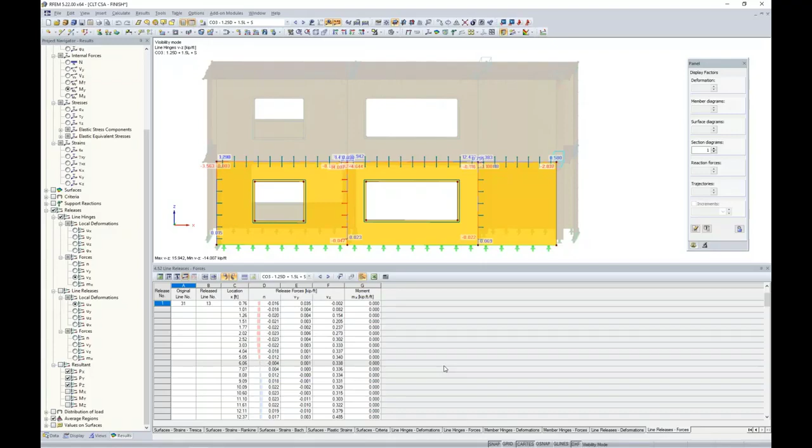Okay, so that really sums up basic CLT design according to the CSA O86 that we recently added into the program. We'll go ahead and sum up today's webinar with a little bit more information. I know that was quite a bit of information on both RF-LAMINATE as well as our main program RFEM.